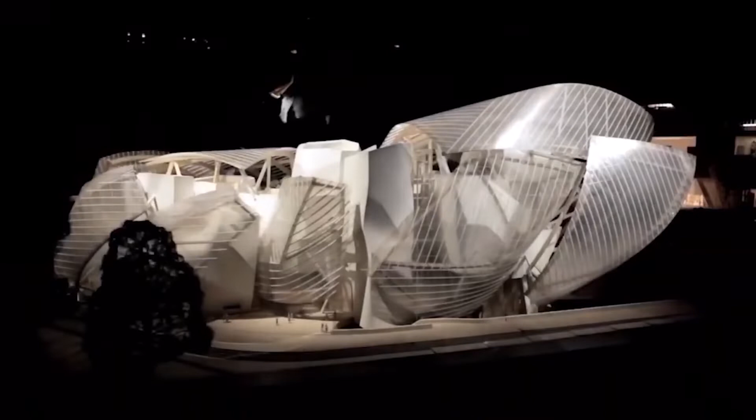Through 10 presentations so far, we have found out how the Louis Vuitton Foundation was constructed. The Louis Vuitton Foundation is an art museum located in Paris, inside the Boulogne forest, which is called the Lungs of Paris.

At the request of Bernard Arnault, the CEO of LVMH and client of the construction project, Frank Gehry, an eminent architect, designed this building—a unique, iconic, and bold structure, a magnificent vessel symbolizing the cultural calling of France. He was inspired by ship sails, glass roofs, 19th century French gardens, and icebergs. The combination of these elements led to such a mysterious design.

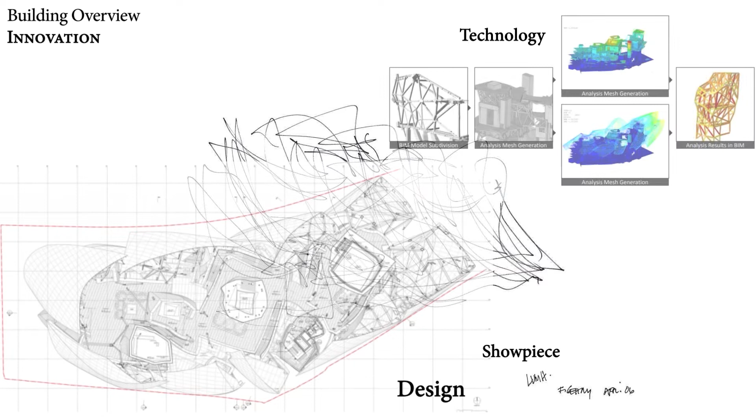Respectful of a history rooted in French culture of the 19th century, he dares to use technological achievements of the 21st century, opening the way to pioneering innovation. It is a showpiece, not only of art, but of design and technology. From initial architectural research to unprecedented engineering, cutting-edge building techniques combined with unique artworks make the Foundation Louis Vuitton a dream come true for all stakeholders in the project.

The general information on this LVF project is as follows.

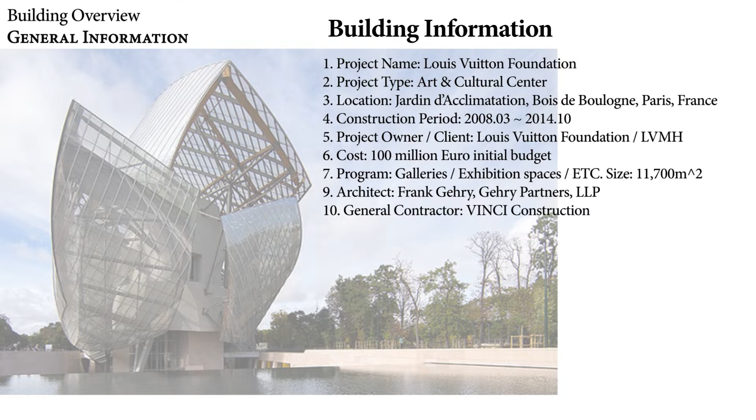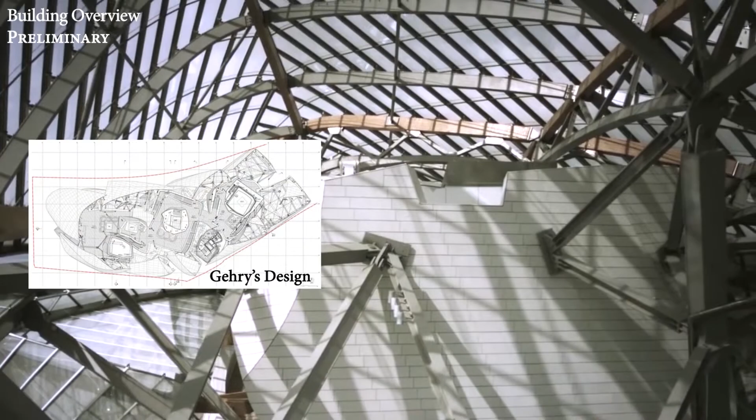The Louis Vuitton Foundation was an undertaking of unprecedented architectural complexity, requiring countless technical and technological innovations with groundbreaking design and construction methods. In order to conform to Frank Gehry's design, the people involved in the construction work found solutions to numerous unprecedented technical challenges, from the initial conception of the project right through to its finishing touches.

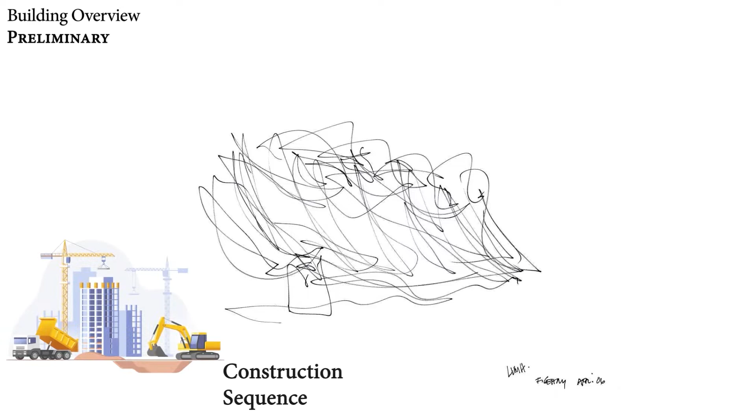From now on, I'm gonna present to you the construction sequence and engineering issues of the Louis Vuitton Foundation, about the process from the art to the reality.

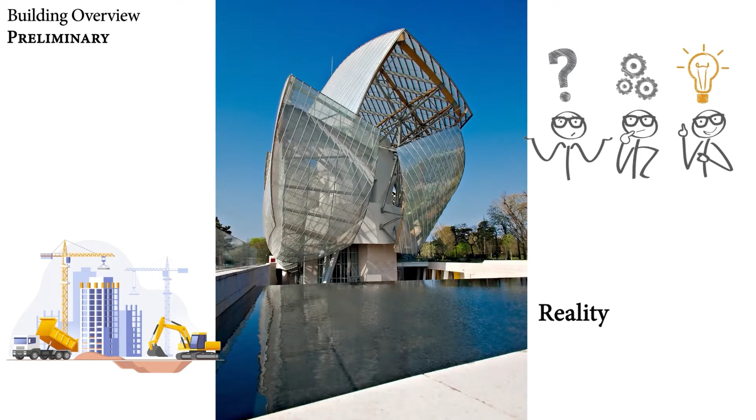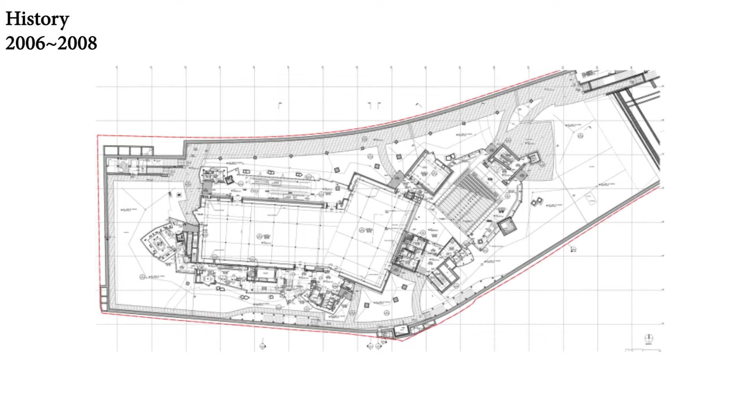In October 2006, the creation of the Louis Vuitton Foundation was officially announced. By an agreement reached with the City of Paris, granting occupancy of public land, the Louis Vuitton Foundation obtained a 55-year lease for a plot of 1 hectare on which to construct a building dedicated to art and creation. Planning permission had been granted in August 2007, and construction began in March 2008.

Let's start with the excavation. Boring tests were conducted for the excavation, and engineers found the clay layer 6 meters below the ground. We were able to know the reason for that issue from the origin of the site, Paris.

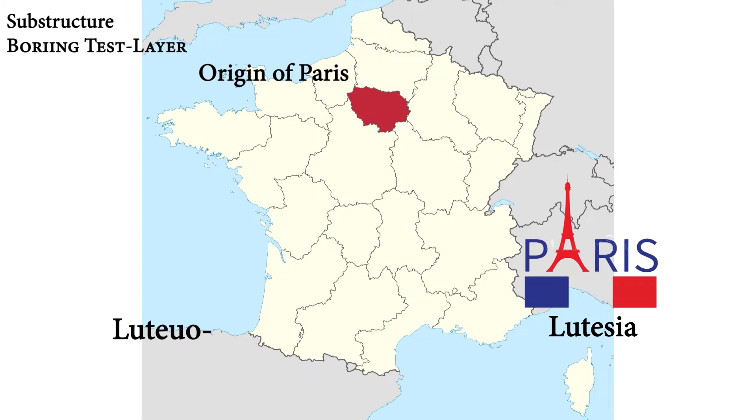There is a theory that one of the origins of the name Lutetia, which is the origin of Paris today, comes from the ancient Celtic word luteo, meaning swamp. In fact, the ground of the city itself in Paris is not very solid, so it is difficult to raise buildings high because Paris is a city built on swamp.

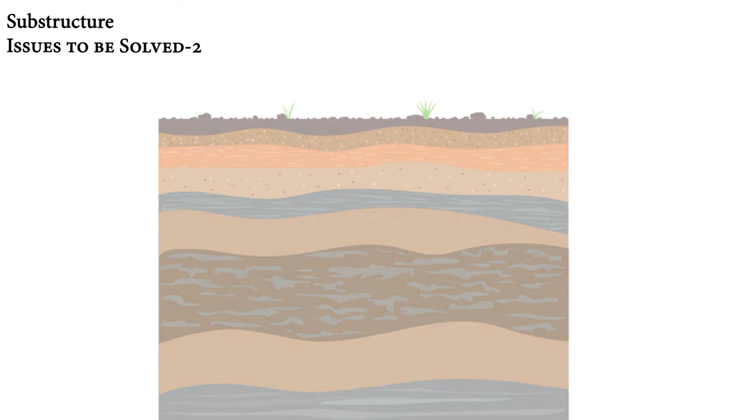Not only the existence of the clay layer, but also the asymmetric structure of the Louis Vuitton Foundation was a challenge for engineers. Due to the non-symmetrical shape, a stress concentration section could be generated. Therefore, it is difficult to disperse bending moments and shear forces to the surrounding ground, which may ultimately cause cracks of the foundation.

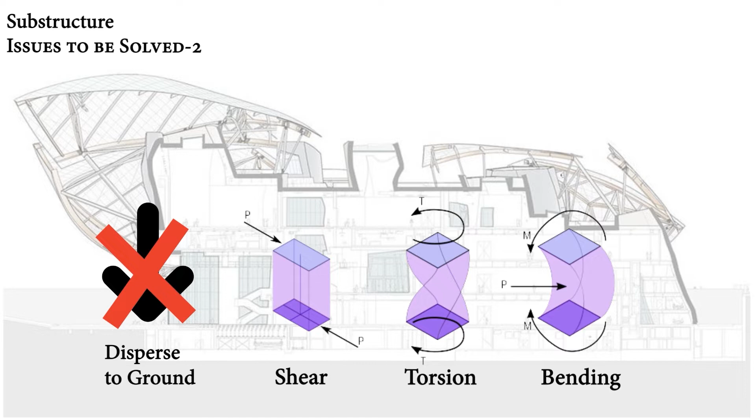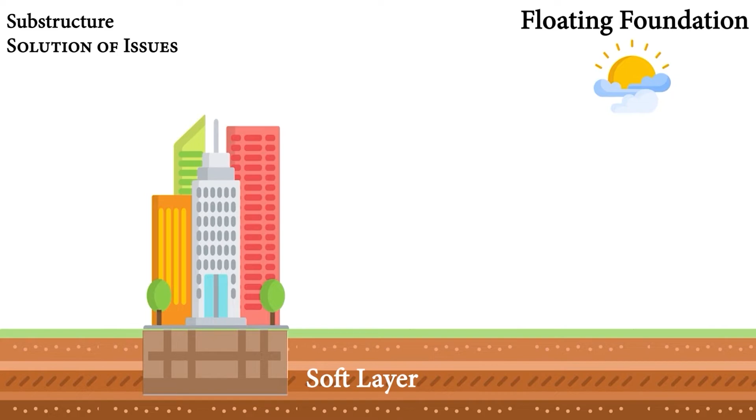These conditions were challenging for engineers. To solve these issues, engineers used a floating foundation for construction. By using the floating foundation, the foundation could be constructed on the soft layer without piles. To realize it, engineers had to consider that the soil volume under the ground and the weight of the building should be balanced.

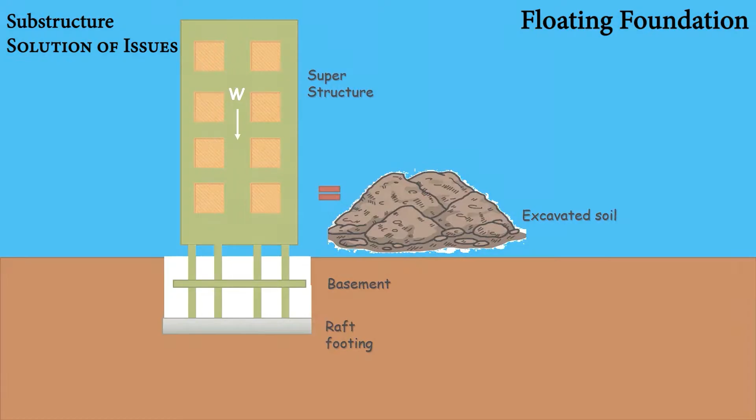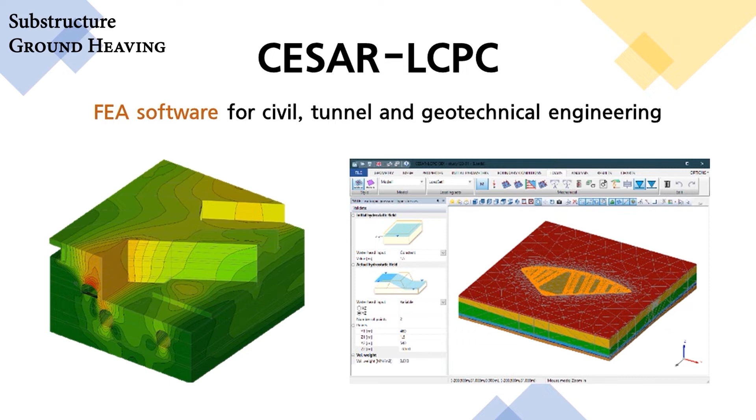However, the ground heave also had to be considered, which occurs during excavation. Engineers saw this as a new opportunity to develop 3D numerical modeling which considered temporal effect. By using CESAR-LCPC and FEM analysis software targeting the ground and structure, they found a delayed but continuous heave of 1 centimeter—a figure that satisfies the design criteria for LVF.

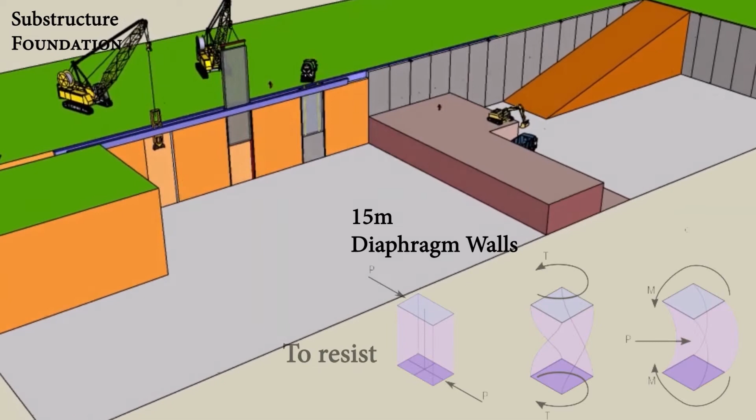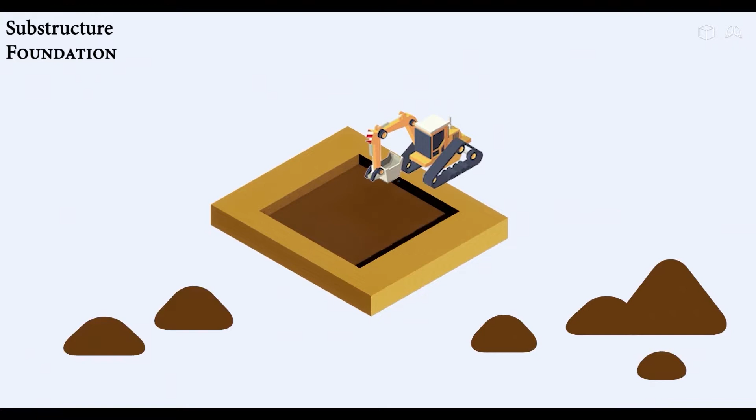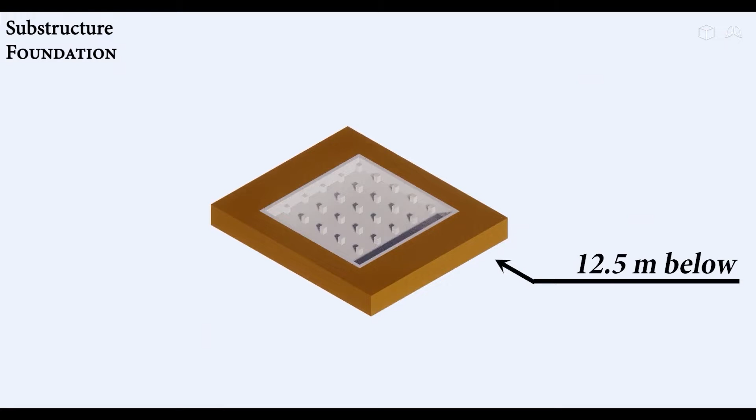As a result, the actual construction process of LVF is as follows. First, 15 meters of excavation was conducted with diaphragm walls to resist bending and shear forces associated with lateral soil loads. Then construction of the floating foundation proceeded, similar to that of a mat foundation, so the large stress could be distributed to the surrounding ground to maintain the balance of the building, preventing floating settlement.

2,600 mm thick reinforced concrete was used to allow uniform loads to be densely dispersed. The rest of the surrounding construction, not structurally linked to the main building, was founded upon reinforced concrete slab foundations of approximately 500 to 600 mm in thickness. Now the superstructure of the Louis Vuitton Foundation is ready to be built.

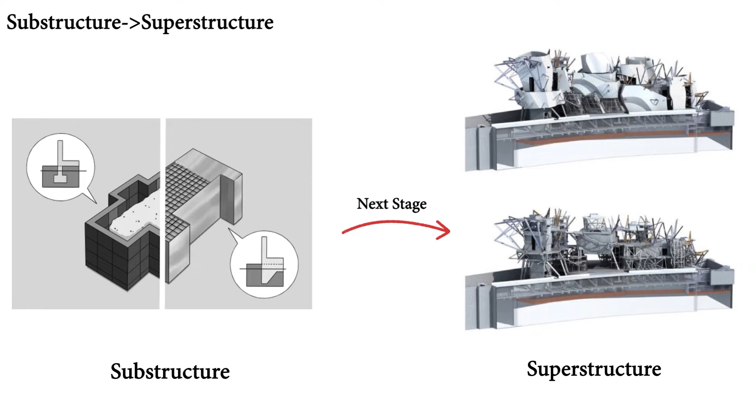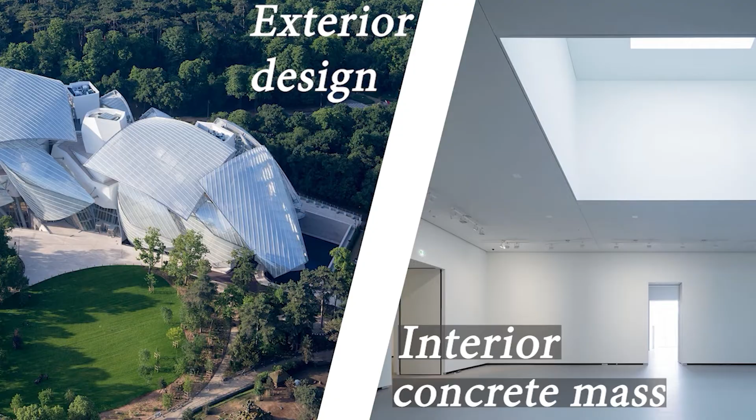After the construction of the foundation, engineers began to construct the interior spaces of the building. Looking at the composition of the building, there are various spaces for the use of art galleries, such as 11 galleries and an auditorium used as a concert hall. Interestingly, unlike the exterior design of the LVF, which seems quite complex, the interior concrete mass was not much different from the shape of a typical building. This was the client's request, and in contrast to Frank Gehry's strong design inclination, it has a fairly simple form.

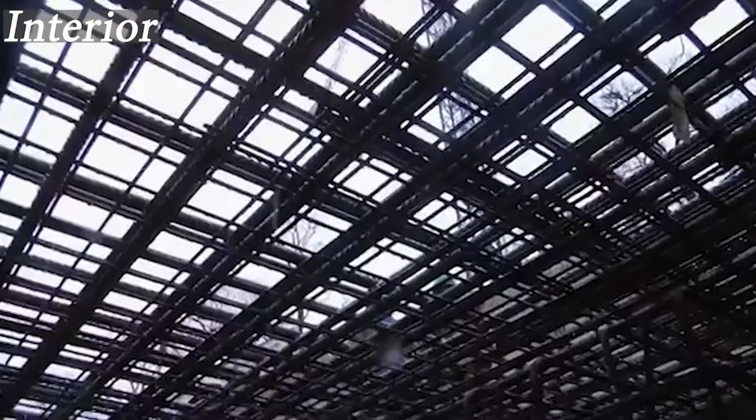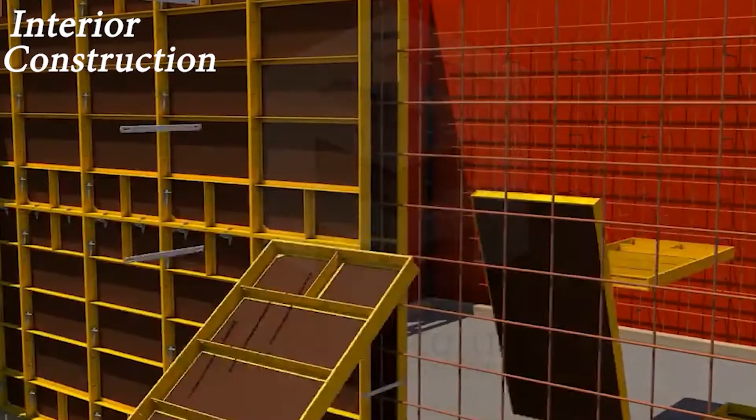The spaces inside the building consist of a series of rectangular rooms at the center of the plane. In most cases, this was not different from conventional reinforced concrete construction. Layouts were drawn to ensure the rebars and molds could be placed correctly on the floor, and Euroform was used to help ensure concrete maintained its shape and gained sufficient strength during curing. Scaffolding was used to construct high places that could not be reached by workers.

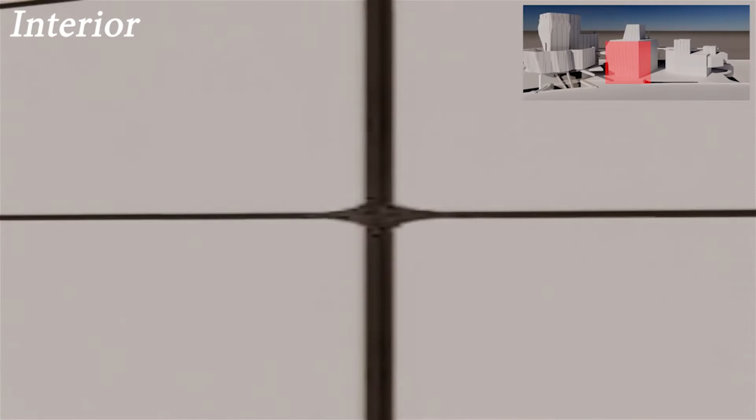As we developed 3D models of LVF and analyzed the construction of the building, we found there are few columns in the interior space, including the gallery. In order to figure out how they built this structure, we tried to determine how the engineers could construct the interior of LVF without using columns.

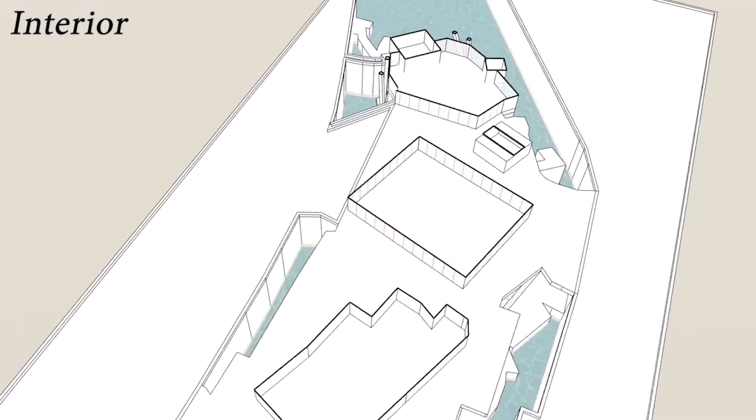We guessed that they used a wall column structure, because we could find that the interior space of LVF is a complex of simple rectangular concrete masses. With a wall column structure, it's possible to transfer the load through the wall and create space without using columns. That was the key concept for construction.

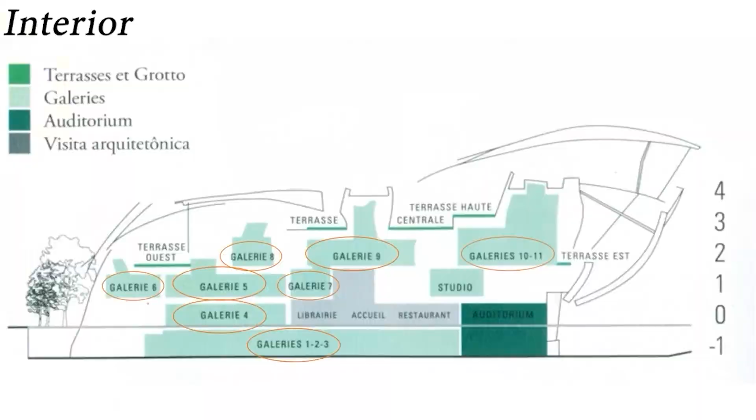Although the client's needs were solved using a wall column structure, other solutions were needed for the comfort of the user's sound environment in the museum. The rooms of LVF require a high noise prevention level, but wall column structure is vulnerable to noise transmitted through the structure. So engineers used an additional construction method.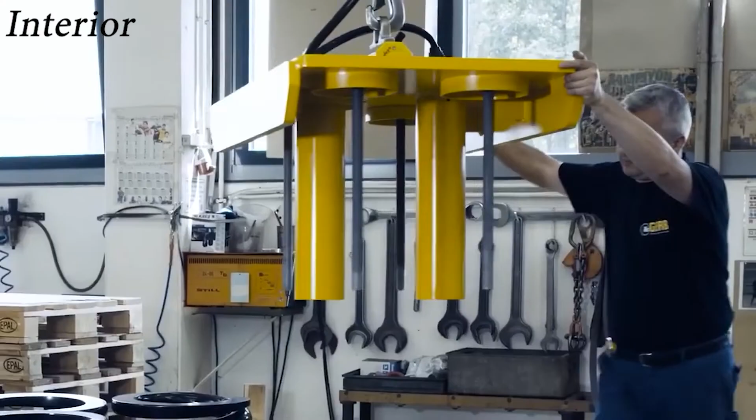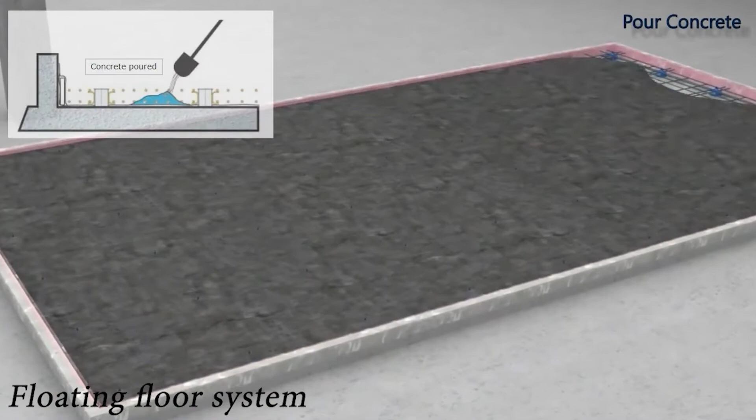It is called the floating floor system. Without using an additional mold, an air layer was made between slabs using a spring system to block noise from surrounding spaces. Because of the gap between slabs, it is possible to prevent the transmission of noise, and with a silicone finish, there is no inflow or outflow of indoor and outdoor air. That is how the engineers constructed the interior space of LVF.

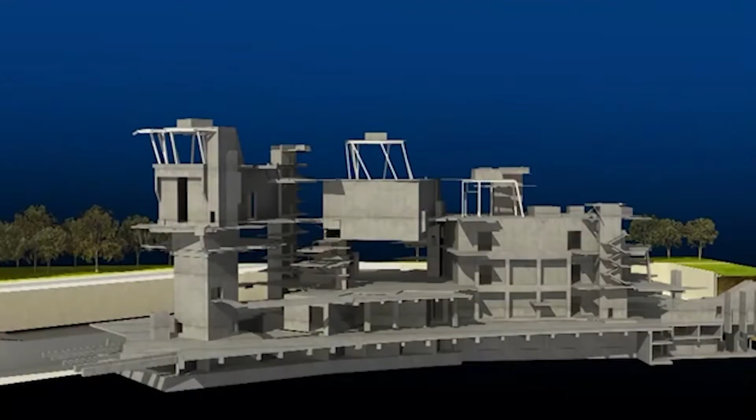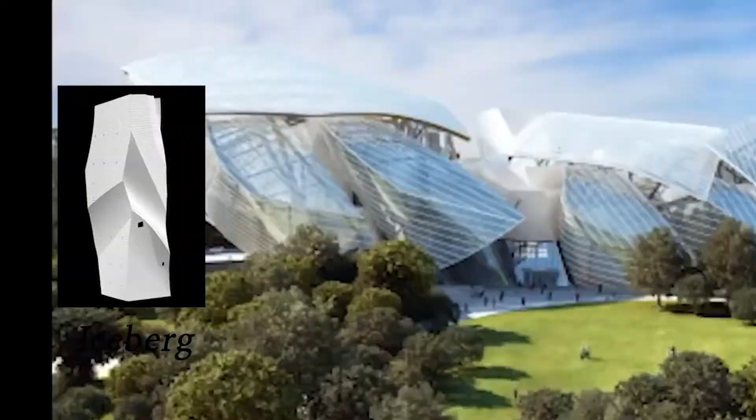Completion of the carcass and fitting of the iceberg's metallic framework. The interior space is constructed in a way that is surrounded by the iceberg and serves as a structural core of LVF. Now it's time to go on to the construction of the iceberg, which is one of the major parts of Frank Gehry's design.

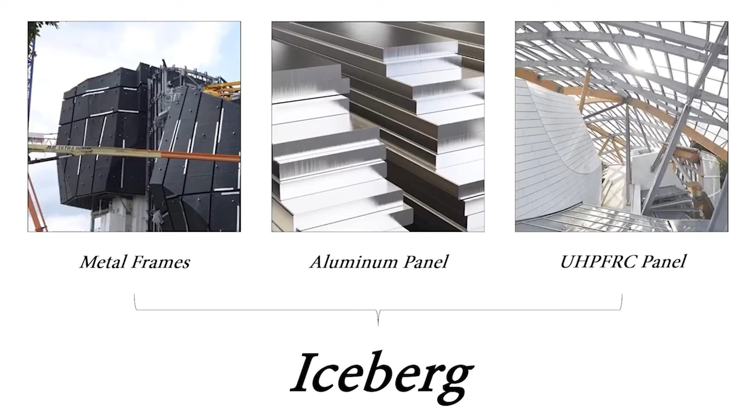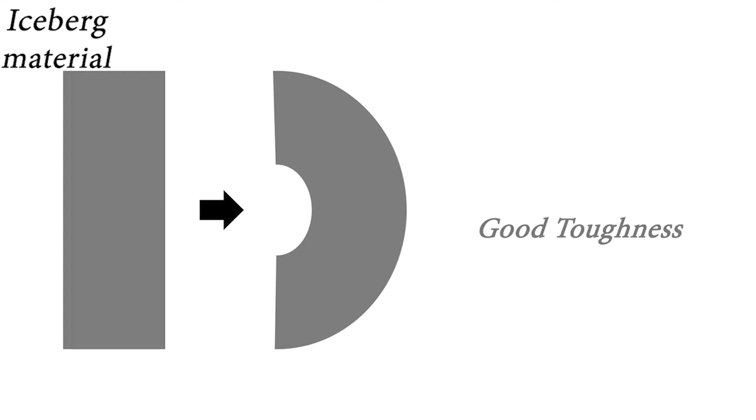As to the iceberg, construction can be largely divided into three parts: metal frames, aluminum panel, and UHPFRC panel. In particular, UHPFRC panel was chosen to represent the iceberg. In terms of material selection, we guessed that engineers selected fiber reinforced concrete as an exterior material because it is effective in expressing bending strength thanks to its good toughness, and it's capable of miniaturizing the cross-section of the member.

About 19,000 Ductal panels of bright white fiber reinforced concrete were attached to one iceberg. Installation of the Ductal ultra high performance fiber reinforced concrete panels: to emphasize the curve of the building, each panel was spaced 10mm vertically and 7mm horizontally when installing the panels.

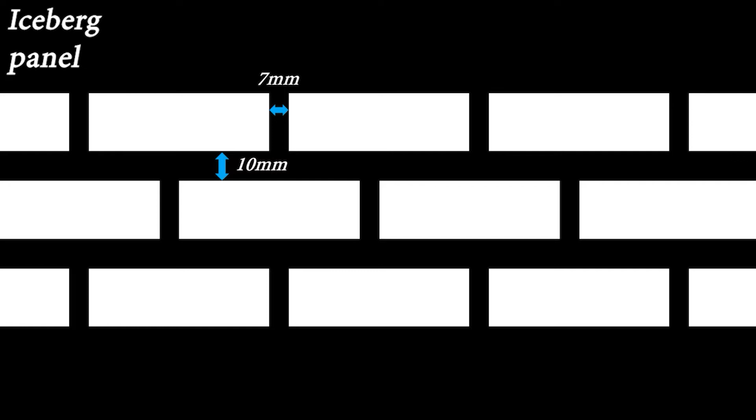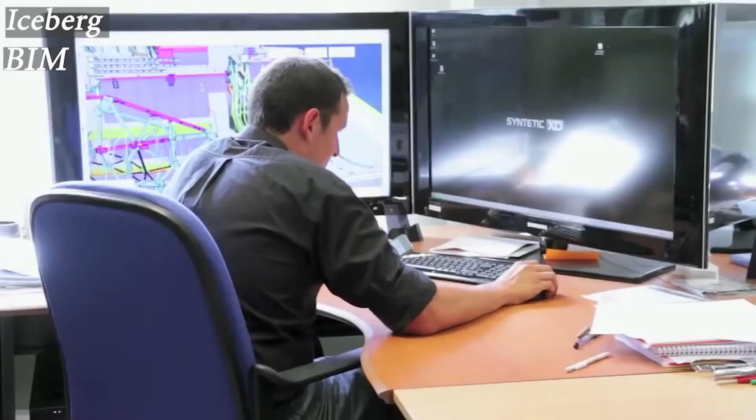To ensure this interval is regularly maintained, each panel was robotically scanned and automatically positioned in the model to confirm correct design and fixation ahead of shipping and installation. Thanks to the use of software, geometrically correct panels with joints and all necessary detailing were imported from Grasshopper into Tekla using Open API, causing almost no additional fine-tuning for each unique panel.

Through the use of BIM, it was possible to eliminate possible misunderstandings among engineers and drastically reduce construction period and cost. Through this process, we knew that engineers had implemented the iceberg designed by architects, but we had one question about the construction process.

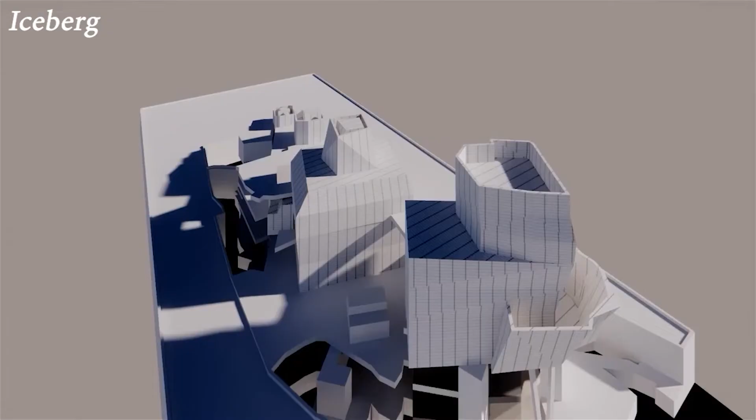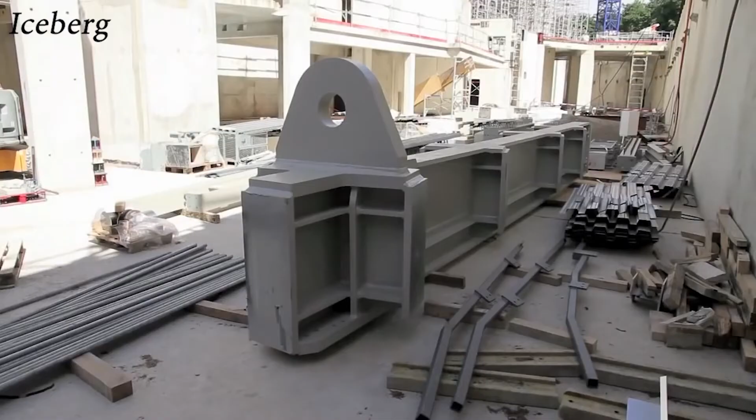If there is a gap between concrete panels to emphasize the curved surface, water or vapor may penetrate through them. If so, wouldn't the material inside rust and ultimately reduce the strength of the structure? We considered this question because a decrease in the strength of the iceberg, which acts as a structural core, is directly related to safety. We were able to find the answer by looking back at the construction process.

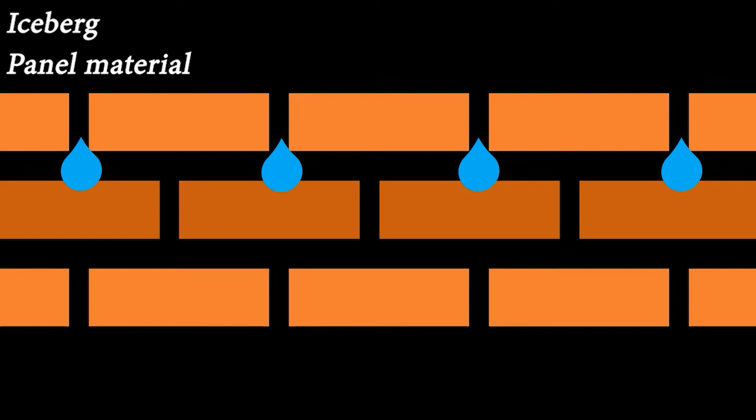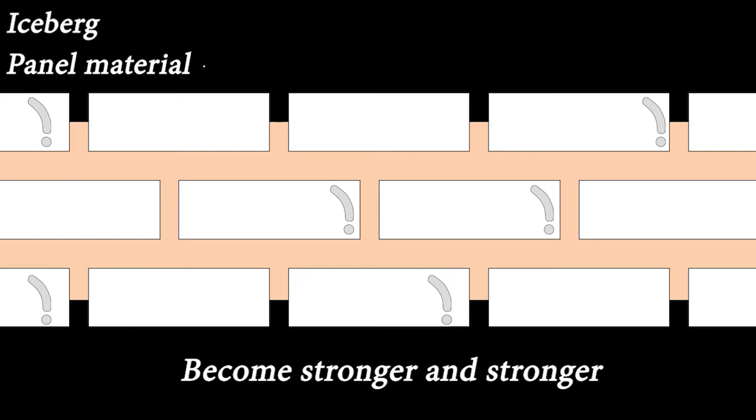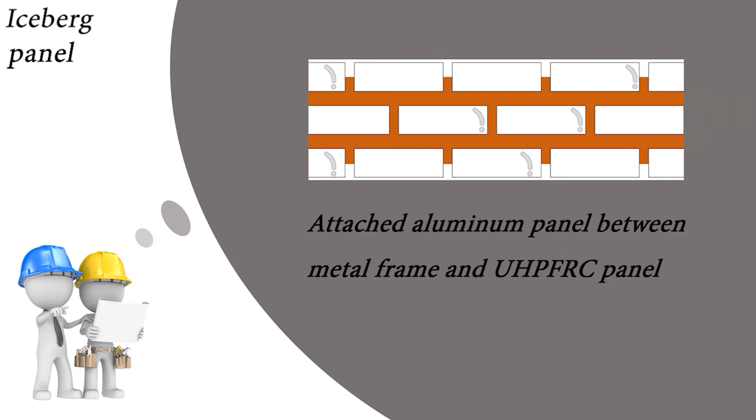The construction of the iceberg proceeds in the order of metal frame, aluminum panel, and UHPFRC panel. Even if metal is well managed and coated, rust caused by water and the resulting change in strength is inevitable. However, aluminum becomes stronger and stronger by forming a thin and dense film on the surface through oxidation. So we thought that engineers attached an aluminum panel between the metal frame and UHPFRC panel so that there was no problem of strength reduction due to corrosion, even if a gap between panels exists.

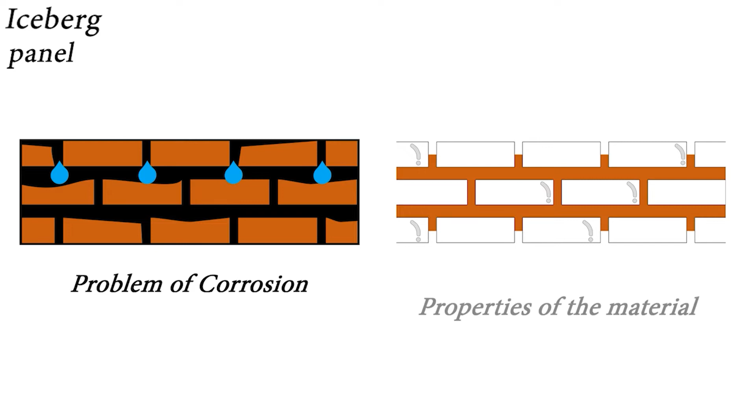Engineers implemented the iceberg design intended by the architect, and the problem of corrosion was also solved by reflecting the properties of the material in the construction process.

Architect Gehry wanted the building to look like a huge ship floating in the wide sea. Therefore, he sketched the shape of the ship's sail and created the design of the building.

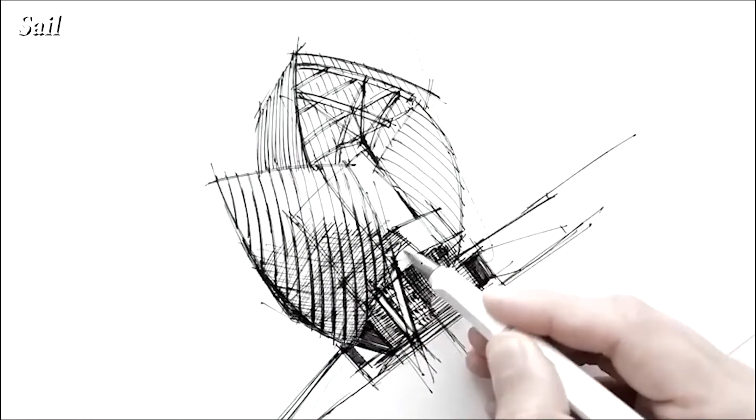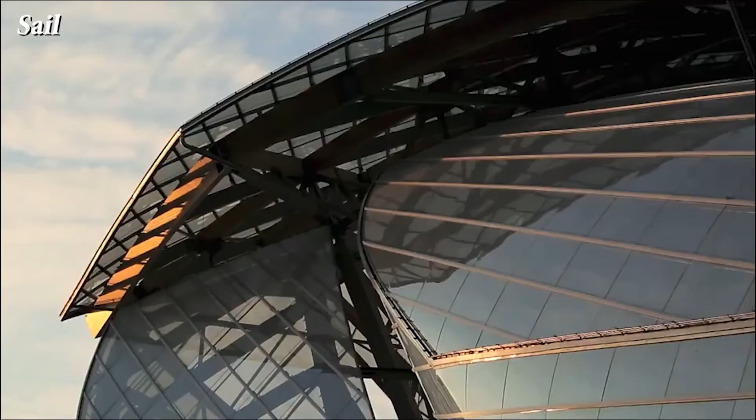To design a building and then make it into a real building, engineers made it into a 3D model in a computer. Looking at the appearance of the LVF, it can be seen that it is quite complex and it was almost impossible to make it a 3D model. So architect Gehry and his company Gehry Technologies made this possible by incorporating CATIA programs, which were mainly used in the aerospace industry, into architecture.

Engineers created LVF buildings using various BIM tools such as CATIA, Tekla, and Grasshopper. BIM tools have helped express complex curved forms, work efficiency, and accurate calculations for structural stability.

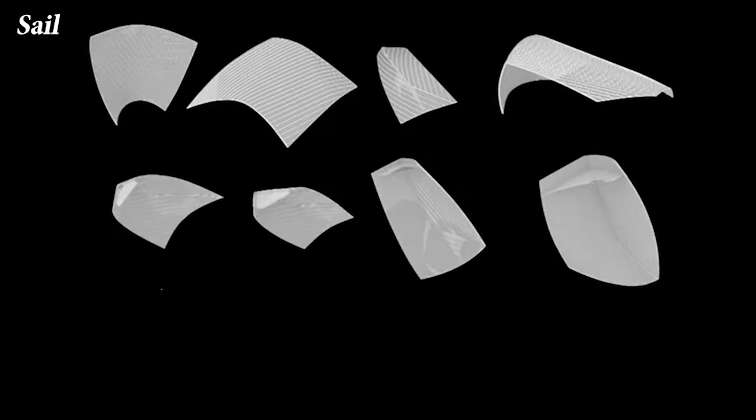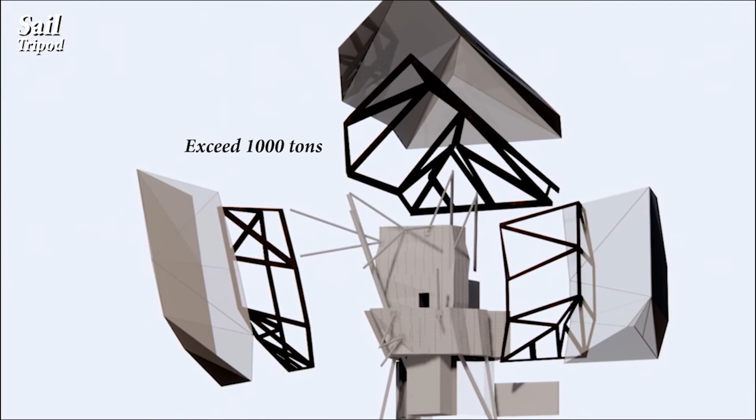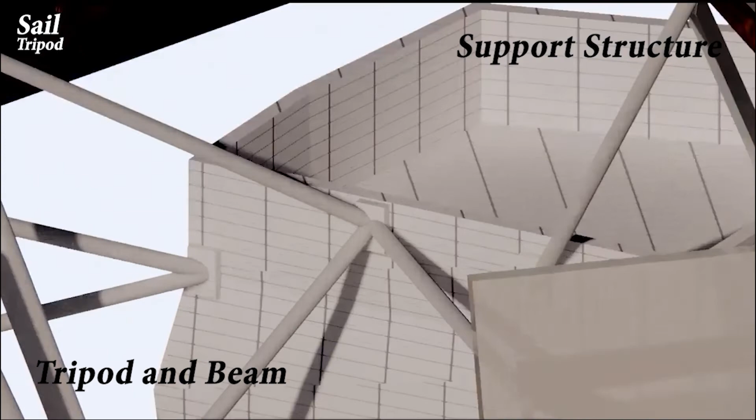This is the sail of the LVF. There are 12 sails which are supported by the tripod structure and carry the load to the iceberg below. As the load at the fixing point of the building exceeded 1,000 tons, the constraints imposed by the basic structure of the building had to be responded, and in addition, the tripod and beam were selected as the support structure of the sail in consideration of the design aspect.

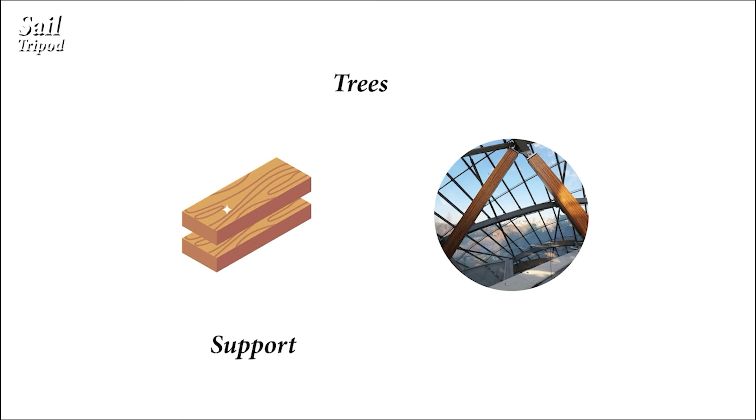The tripod consists of 100 mm thick carbon steel, duplex stainless steel hybrid plates, and nodes. Because the architecture had to look like a huge ship according to Frank Gehry's goals, trees were selected as the material to support the edge of the sail that was most visible in the tripod.

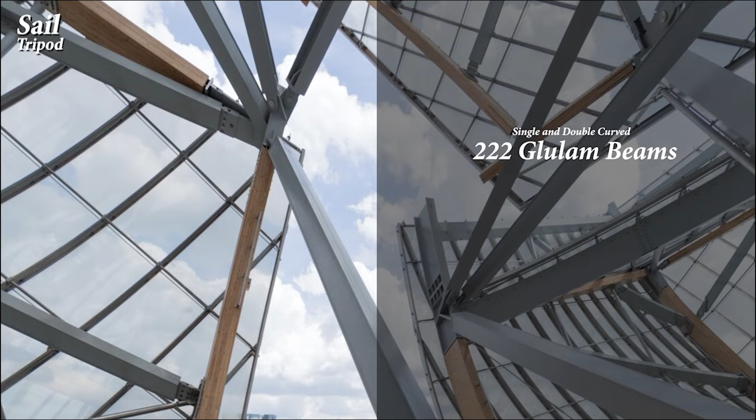A total of 222 single and double curved glulam beams were used, and the maximum length of the wooden beam was 28.2 meters. High-strength molybdenum containing duplex stainless steel was used as the steel that made up most of the tripod with wood.

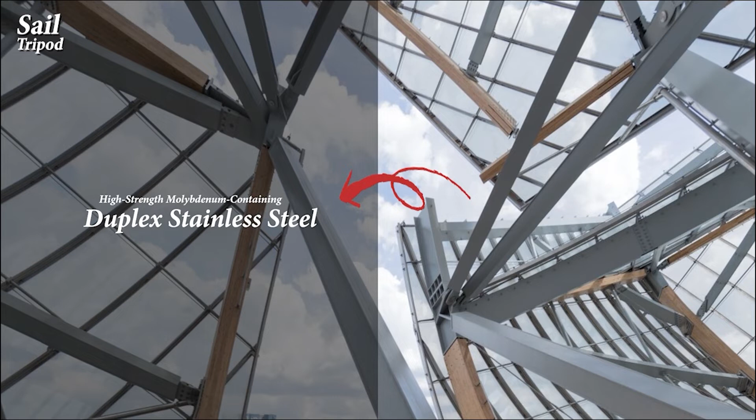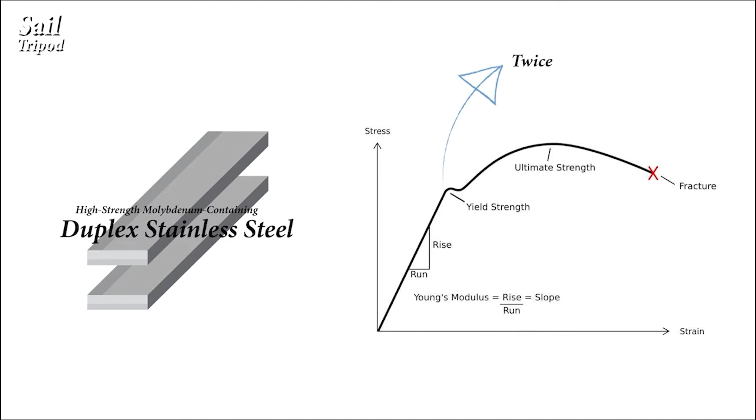The reason why this steel was used instead of 316 stainless steel, which is more commonly used, is that it works well in more corrosive environments such as atmospheric conditions in Paris. And because the steel has twice the yield strength of 316 stainless steel, it was able to support a huge sail with a smaller amount, which reduced the tripod's load by 30%.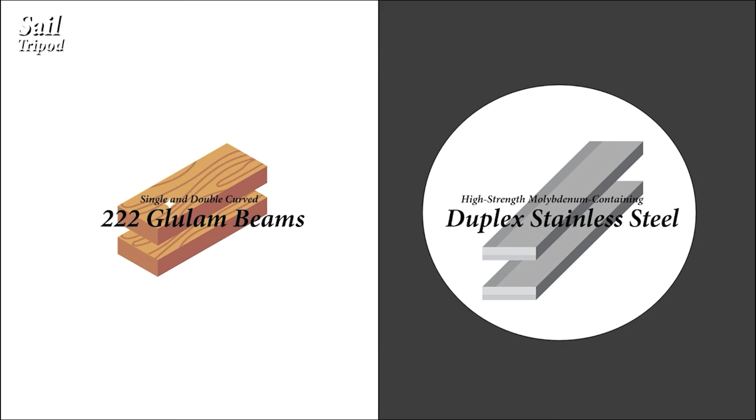After the selection of the material, each member of the correct size had to be connected in the air. But because the size of the material was huge, fine gaps or angle differences could lead to the collapse of the building. Delicate member connections were essential.

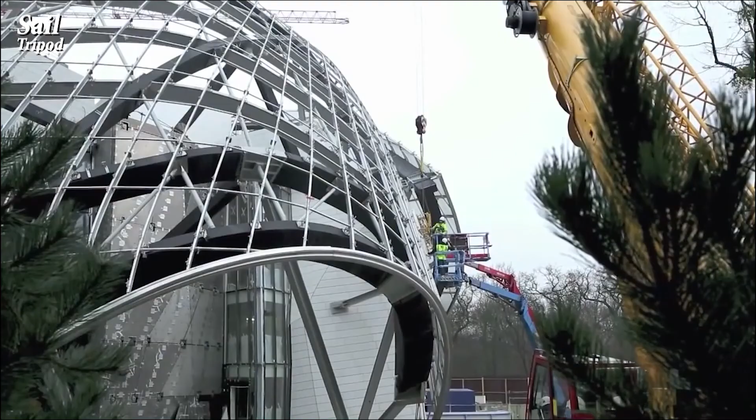Each factory-made member of the correct size is lifted with the crane in a suitable position. Afterwards, the angles of the two members are measured through a state-of-the-art machine for accurate engagement of the members, and the correct position of the members is taken in line with the 3D model, and the worker completes assembly in the air. Through this process, the tripod of exactly the same type as the 3D model, which was designed geometrically and structurally, could be created.

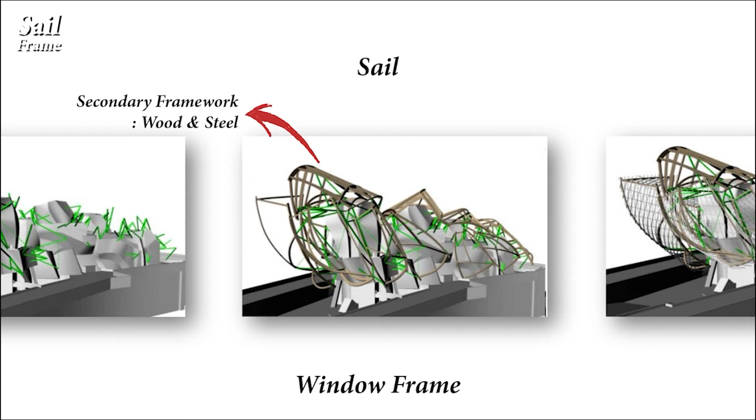Since it was then necessary to create a frame for glazing, a secondary framework of wood and steel was added to the tripod to create a window frame. In addition, steel girders were constructed at regular intervals on the window frame to create a grid shape in which glass could be inserted.

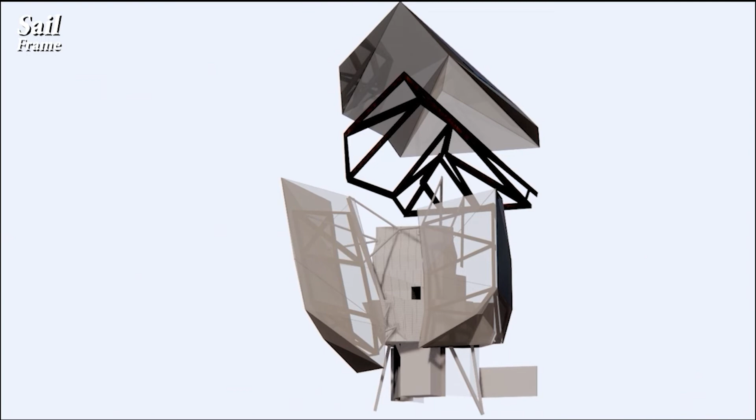If glass is attached to this grid, it will have the same shape of sail as it is today. The sail covers a total area of 13,400 square meters, with the largest sail covering an area of 3,000 square meters and weighing 800 tons. And the surface of the sail is covered with 3,600 glass panels of different sizes.

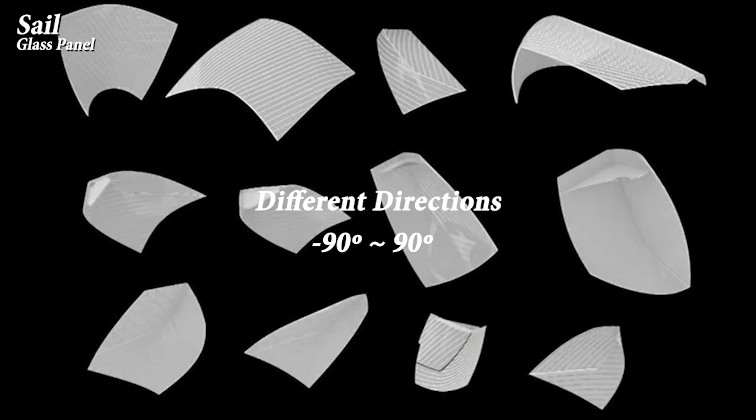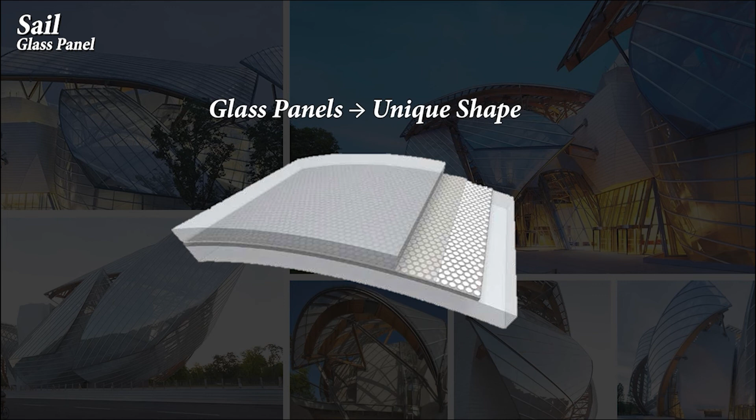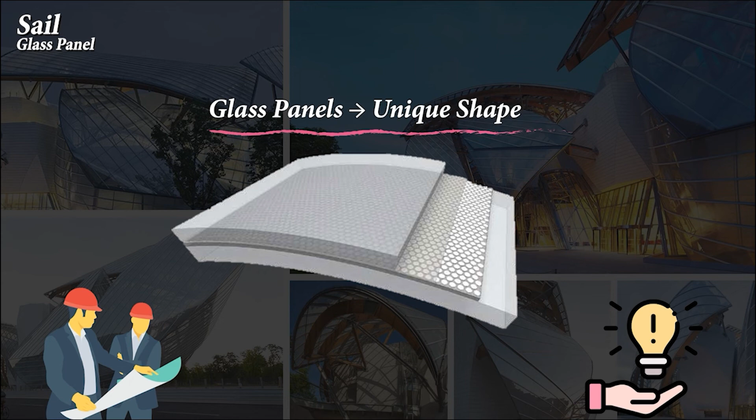Each of the glass panel surfaces constituting the sail has a different direction from -90 degrees to 90 degrees. In addition, given the complexity of many aspects of the sail, each glass panel needs a unique shape. This was an attractive challenge for a multifaceted architecture and engineering team responsible for design, fabrication, testing, verification, and installation. However, the most important task among them was to create a unique geometric structure for each glass panel.

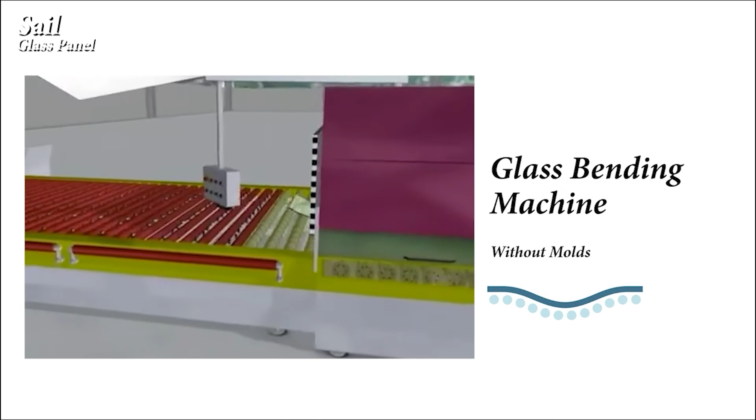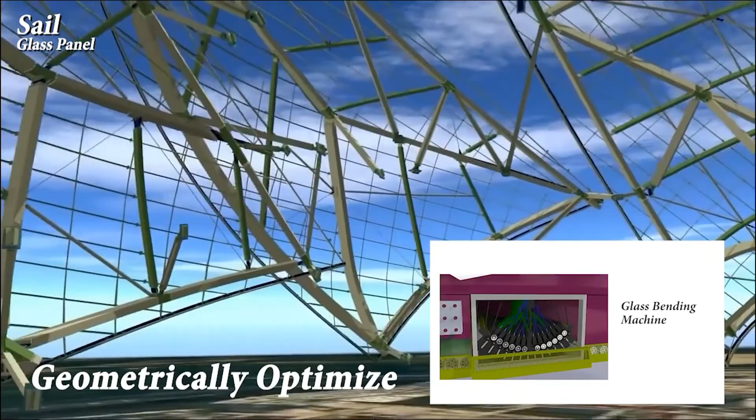The solution to this was a state-of-the-art glass bending machine that could bend reinforced glass panels to various shapes without using molds, as the typical method of manufacturing curved glass was too expensive. Sunglass, a glass panel manufacturer, has geometrically optimized the existing glass bending machine for the perfect implementation of sails and is prepared to produce glass panels with double bending shapes.

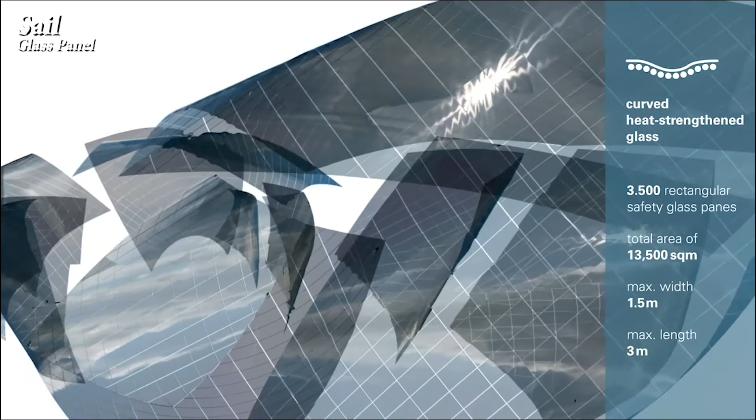Starting with the challenge of the giant company Louis Vuitton and the great architect Frank Gehry, the constant effort of more than 400 engineers to select perfect materials, 3D modeling, and high-tech construction technology allowed the beautiful building Louis Vuitton Foundation to be built in Paris.

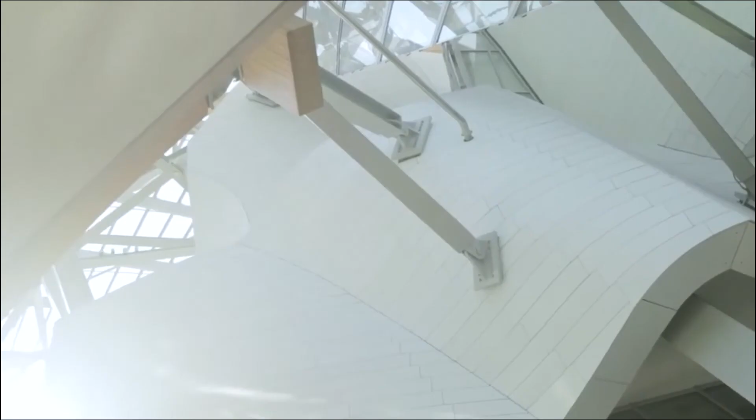In the future, better architectural technologies will be developed, and there will be constant challenges to architects and engineers. And we think we will be able to experience more great buildings in our lives.